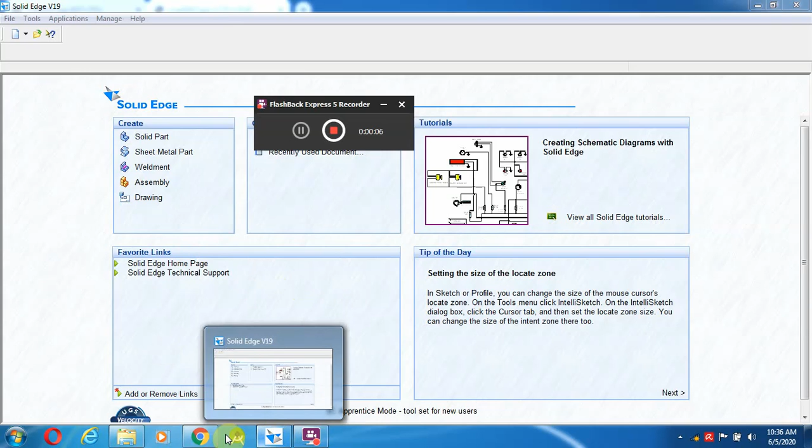Then comes the parts. There are totally 11 parts in the tool holder: tool holder, base plate, mover, stud, handle, knob, ball, spring, set screw, grub screw, washer. The 11 parts we have to create with Solid Edge, and after creating we are going to make the assembly with the help of assembly in the Solid Edge software.

So first we are going into the solid part. After going into the solid part, we are going to create first the tool holder. First part is tool holder. There are only two views given, the sectional front view as well as the top view provided for the tool holder.

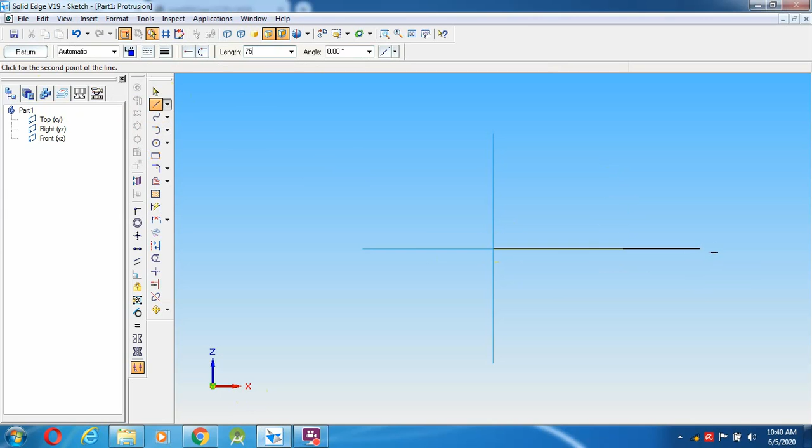So select a line from middle to 75, enter, again 75. Now I am going to give 150 and angle is 180 towards the left side, so that angle comes as 180. Now again 150, enter. So here 150 is going to join over here.

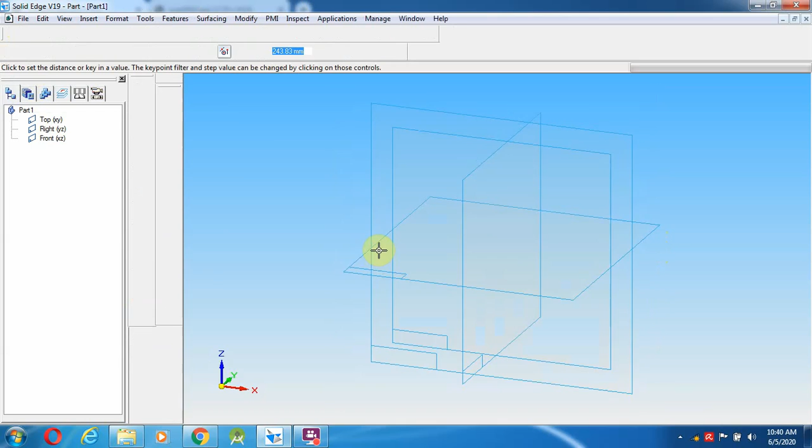Then select the line and delete those reference lines. Then give return. So how much mm does it have to be? 30 mm in depth. So 30, enter, left and right click. After giving this, I am going to make another one, the next smaller one.

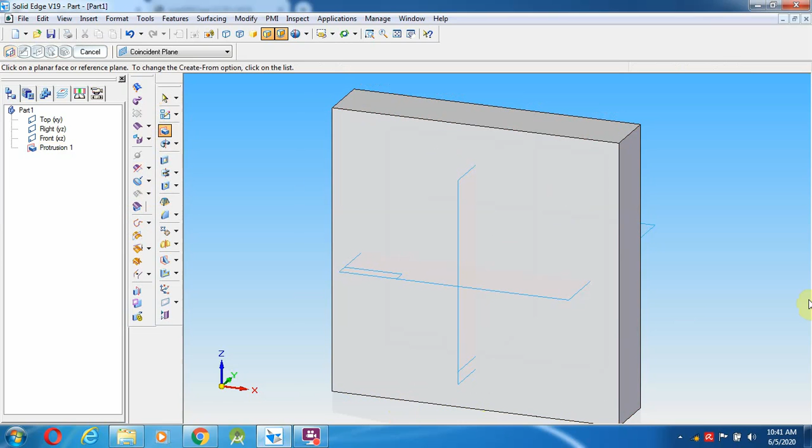This also they have given here as a square, 80 mm. Seeing from here it will also be square, even with the help of this dotted line you should understand. That is the depth of 40 mm. So go over here. Either this side or that side, you can choose anything. I want to keep the plane on this side, so I am going to select this side to draw.

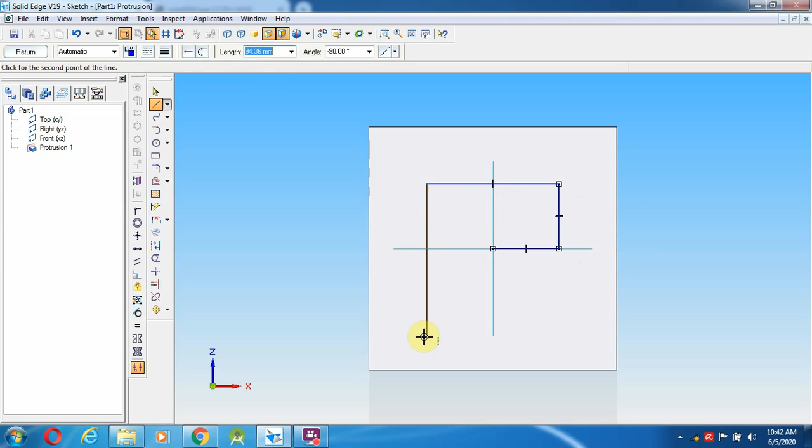For this one I'm going to select a line from here to 80 mm, meaning 40 mm distance, and again 40 mm towards the top. Now I'm going to give 80, enter, again 80, enter, 80. Now I'm going to join these lines, then select the particular line and delete that line. Now give return towards this side, so depth is 40 mm, it has to come over here.

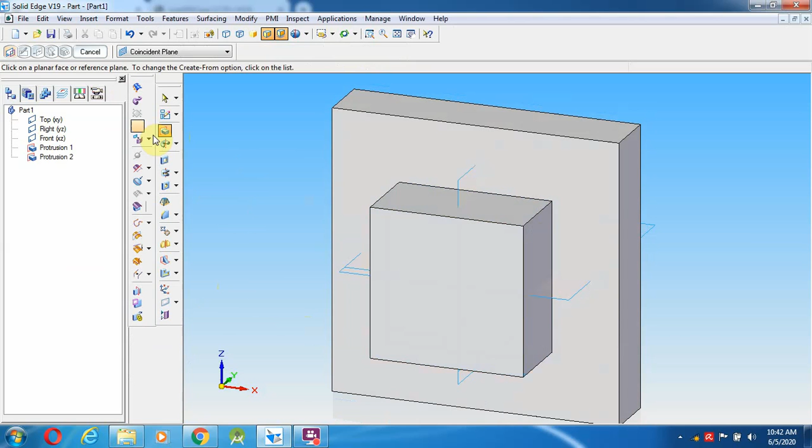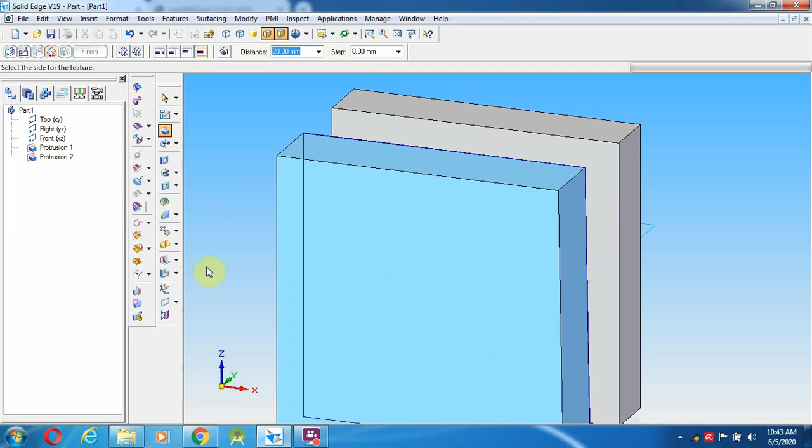After creating this, again go over here, select, and we are going to draw the bottom block. The bottom block has the same dimension as the top one. So select the edges over here, and I am going to construct; the dimension will remain the same, give return. This will be 20 mm distance; see over here the depth is 20 mm. So select distance is 20 mm, enter, and towards this side left and right click.

Now I am going to rotate the component, then you can save it. Go to Save As, and you can save it in the particular area.

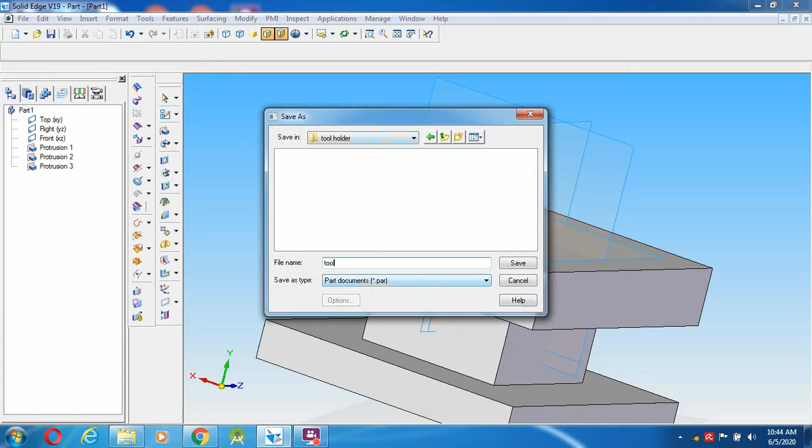So I created the folder over here, tool holder. So there I am going to save the particular things. Go over here, save as, and change the save location to this tool holder folder. The component name itself I am going to change, make it as tool holder. So the component has to be saved over here. Still so many things have to be done over here, so that is what I am going to do now.

So select first the dimension from here: it is 120 mm length and breadth. Okay, the holes have to be placed. These holes are in continuous line, so from the top they can be viewed. The dotted holes could not be seen from the top, so they will be in the bottom block. In the top block there are 8 holes, M16 tapped. So 8 holes will be placed, and they are threaded.

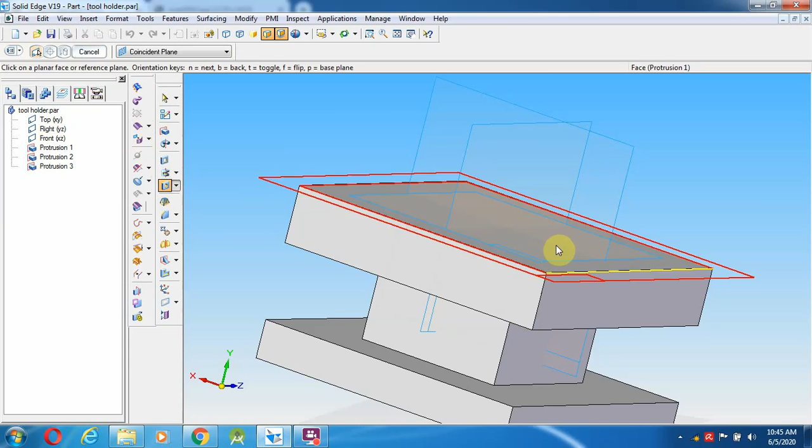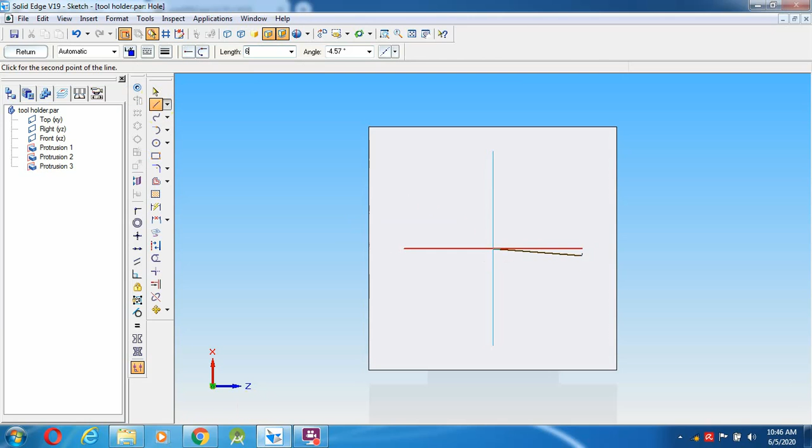Okay, so I'm going to select the hole command. I'm selecting the top surface. In the top surface I'm going to make a 120 mm distance first. From here to here 120, and in the horizontal also it will show 120 mm. So select a line. From here to 60 mm length, and 60, 120, and again 120. Next 120, then I'm going to join over here.

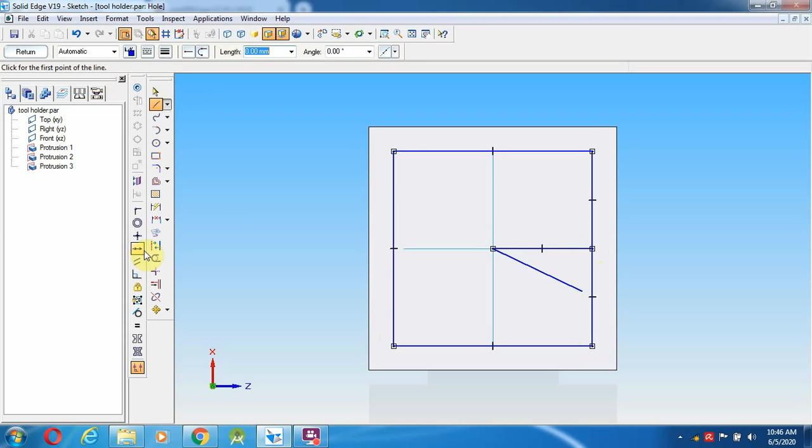Here I drew two lines: one line for reference purpose, and another line mistakenly. Those lines I trimmed. After that I select the hole and change the hole parameters. The hole is given as 8 holes, M16 tapped. That means 16 mm diameter, and 8 holes have to be placed as threaded holes. So make it a threaded hole with 16 mm diameter, select M16, 16 mm, and the hole extent.

Because the hole comes throughout, the tap comes throughout. If you see from here, a continuous line followed by a thin line. Thick line followed by thin line is the symbol of a tapped hole. So select through, which means through to next. You can even give the dimension or through to next. After that, the through hole will go throughout that particular top surface, so the bottom does not require any V shape.

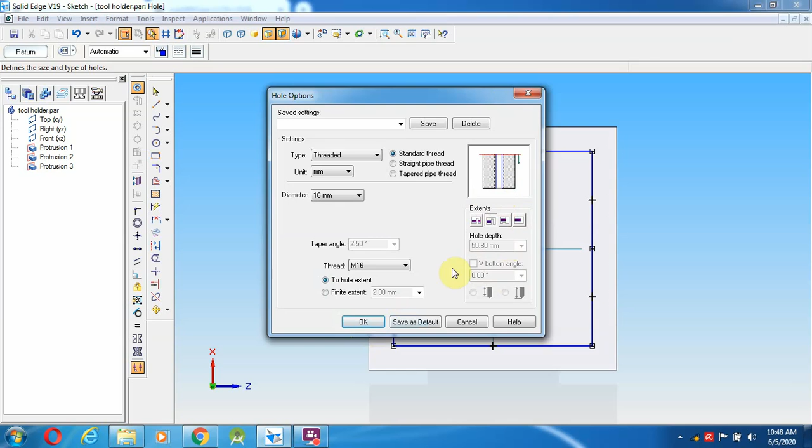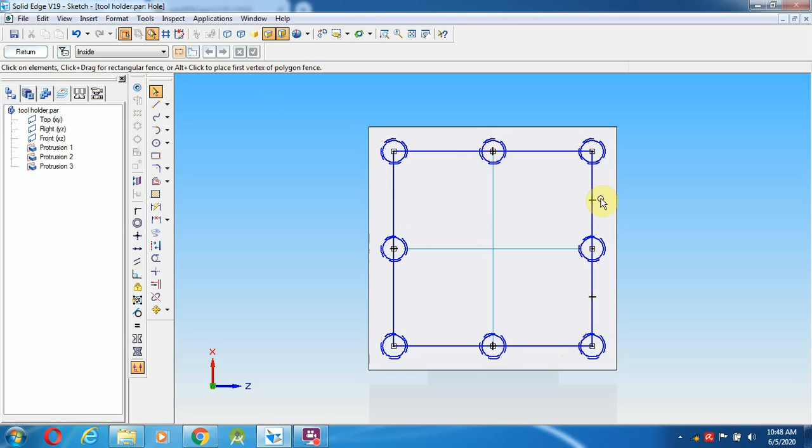So 8: 1, 2, 3, 4, 5, 6, 7, and 8. So there are 8 holes now. At the corners as well as in the middle I am going to place the holes, corner 4 and middle 4. After placing, give return, then left and right click. If you see over here, the holes are created in the top. Then immediately you can save. After saving, another hole comes in the bottom. See over here, it comes in the bottom.

The hole length is 16 mm and the diameter is 10 mm, with V shape. So how many holes are there? See the dotted holes provided over here. There are 4 holes. It is a normal hole. The distance is 52 mm, and the other side also is 52 mm. Horizontal 52 and vertical also 52 mm distance.

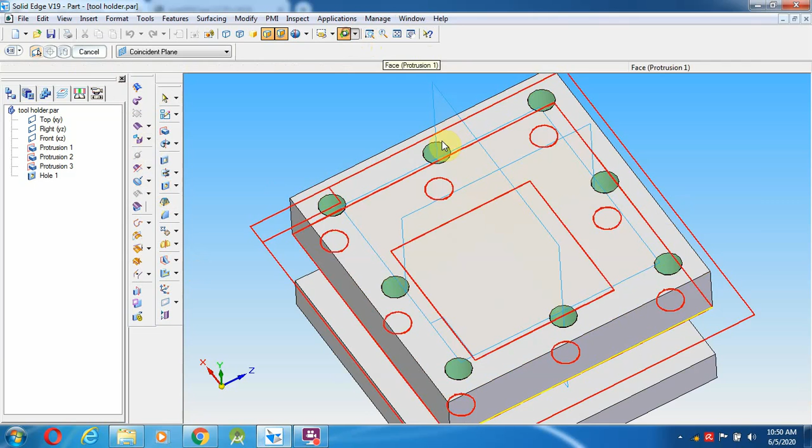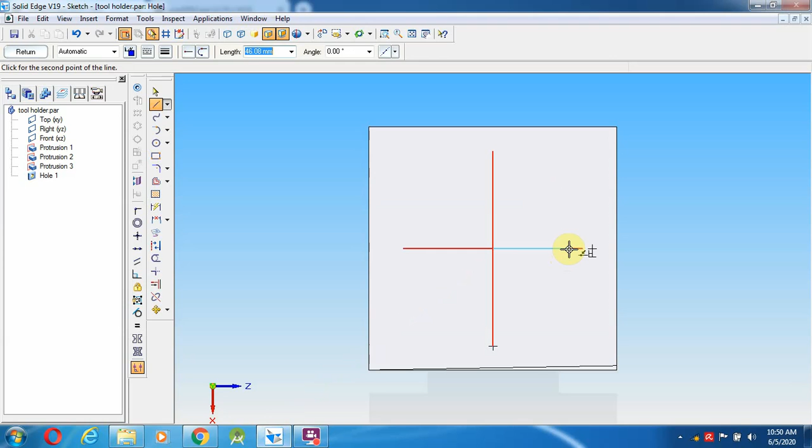So go here, select the hole option again. I'm going to rotate the block, give fit, and select the bottom. After selecting the bottom, select line from the mid line. If you cannot find the mid, you can draw a line and find the mid. So 52 is actually from the mid, no need to worry. So 52, enter. Again 52, enter. 90 degree, enter, and 104, enter, 104, 104, enter. I'm going to join.

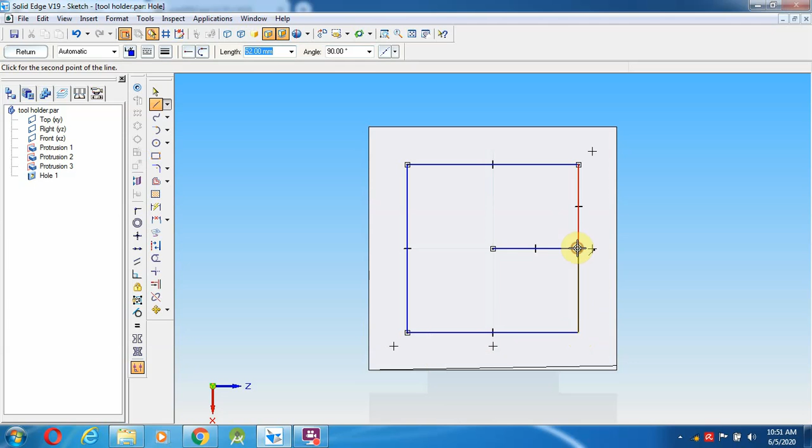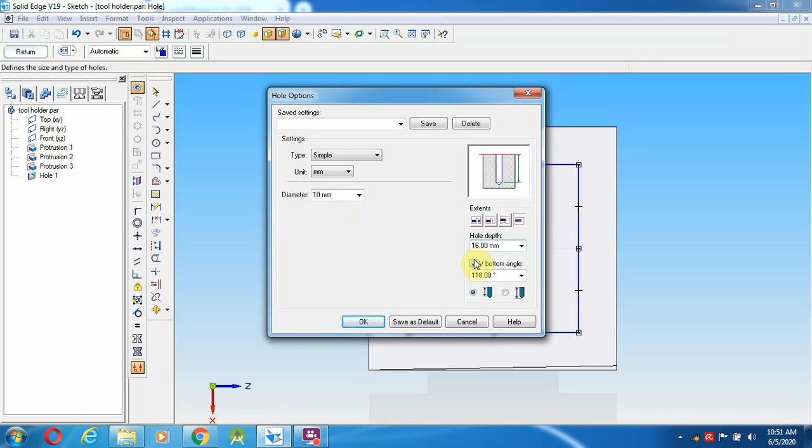You can keep this line too, nothing will affect it, but it doesn't look good, so I'm going to delete it. Go over here. The hole is a simple hole, diameter 10 mm, and instead of through to next, a finite extent value. The length given is 16 mm, so I select 16 mm here. Then V bottom, and in the V bottom I give 118 degrees. So it will be placed exactly on the mid of the lines. I'm going to keep it in the mid.

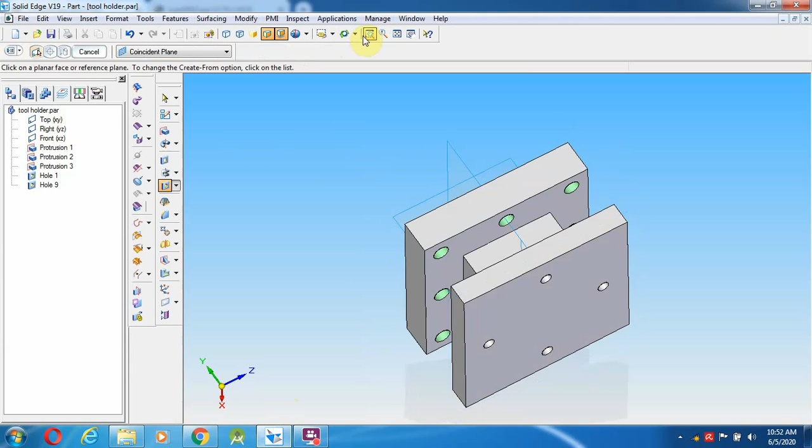So after keeping all the 4 holes, I'm going to give return towards up, left and right click. So always we used to give left and right click. Okay, so if I am giving 45 degree, automatically the V shape will come up to the surface. That's why I have not given it as 90 degree over here. Then I am going to give close, then save whatever I have done. So after doing this, I am going to make this hole.

Okay, so that is given here as 60 mm as well as the 1.5 mm one, and another one will be the 10 mm. So the straight cylindrical hole comes up to 10 mm distance, and the 1.5 mm comes as a small taper. That's why here it will be showing two circle edges. This edge indicates this one, and another edge indicates the 45 degree where it cuts the bottom edge. So those edges are shown as those two circles over here.

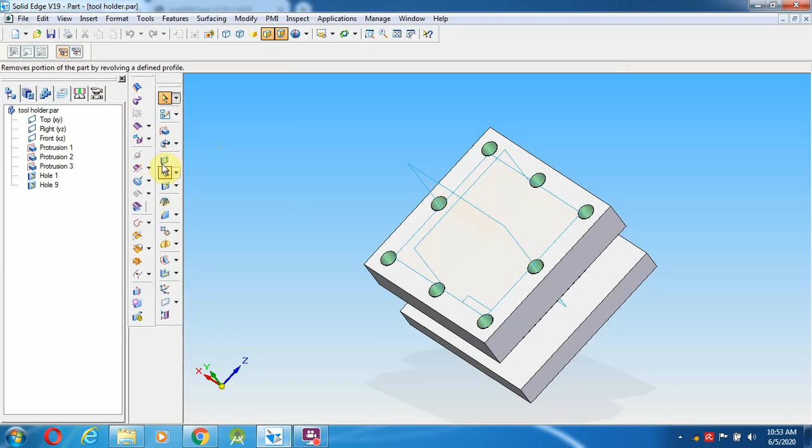Okay, then go here again. I'm going to select the bottom circle, go here, and select the revolved cutout option. That means even in a single step we can complete it. So revolved cutout. Now I'm going to select the mid plane. So here this is the mid plane. Okay, so those things come in the bottom over here. So that is the thing I'm going to draw.

So from the middle to 12.5 mm, so 11.5 mm, 11.5 mm height, and now the diameter they have given is 60 mm. Okay, so 60 mm means from one side I'm going to draw 30, and towards down up to 10 mm. So after 10 mm I'm going to make it 45 degree. So this is towards left, 180 plus 45, 225. So I'm going to give 225.

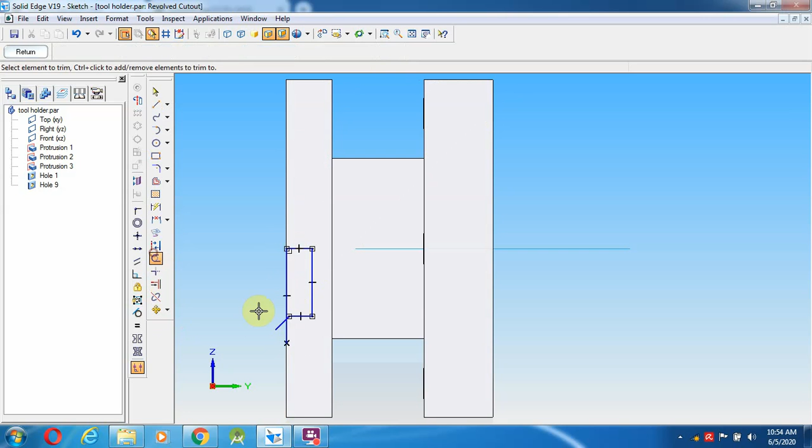Okay, now I'm going to complete. So this surface I'm going to close. Then with the help of the trim option, I'm going to trim these two lines. Select the axis of revolution as this. I'm going to give return and rotate, and I'm going to see the rotation. So 360, or otherwise here there is one more option called to 360. So automatically it will be created. Okay, so this way you have to do this particular cutout in the bottom.

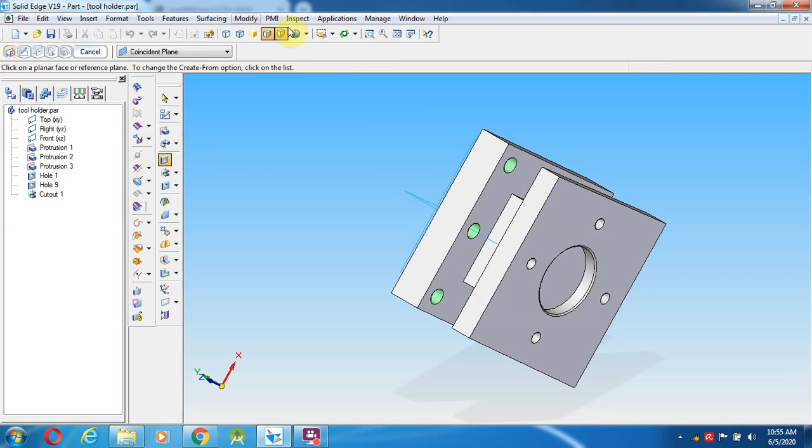So after making this, go over here and select the full depth hole. Okay, so what is the diameter of the full depth hole? The full depth hole is 26 mm. That is shown in the top view. So I am going to make it with the help of the cutout option. Bottom surface or top surface, you can select anything, because the hole comes throughout the component. So I'm going to select the bottom because the view will be clear.

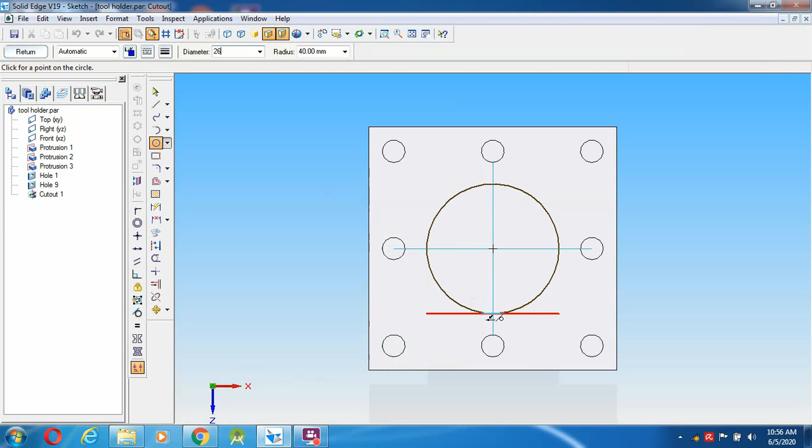So cutout and select the circle. Here once again I'm going to check the dimension 26. So 2, 6, enter. I'm going to give return towards down, left and right click, and save the component. So after saving, this has been created here, even this hole, and almost everything is created over here. Anything left out we will see while assembling, and at that time you can change it. So almost all the things we have completed. I'm going to save and close, then move on to the second component, the base plate.

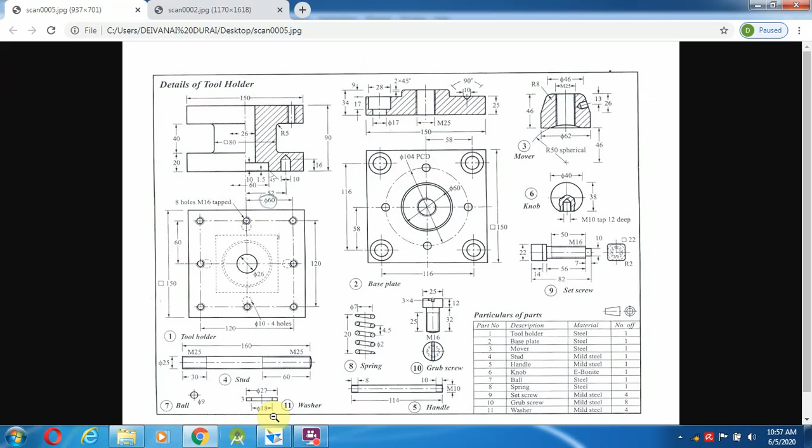Okay, so the base plate is provided here. For the base plate only certain things you have to remember. Okay, almost everything is completed. I'm going to save this. After saving, I will check. Even some more things you can do with this. So I will close, and again select a solid part. After selecting the solid part, now I'm going to do the base plate.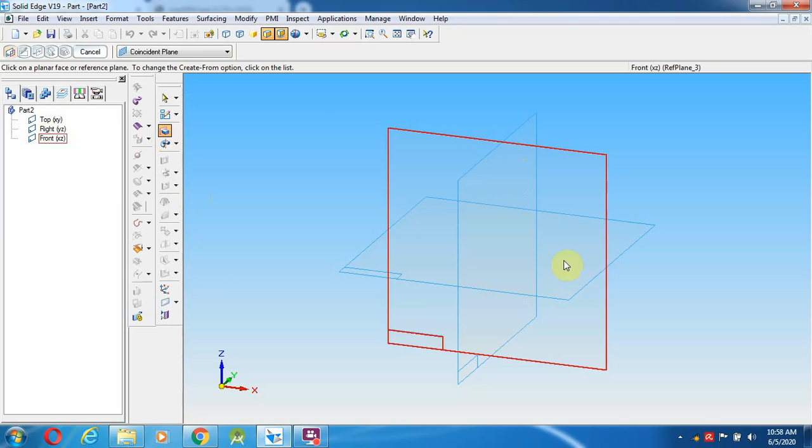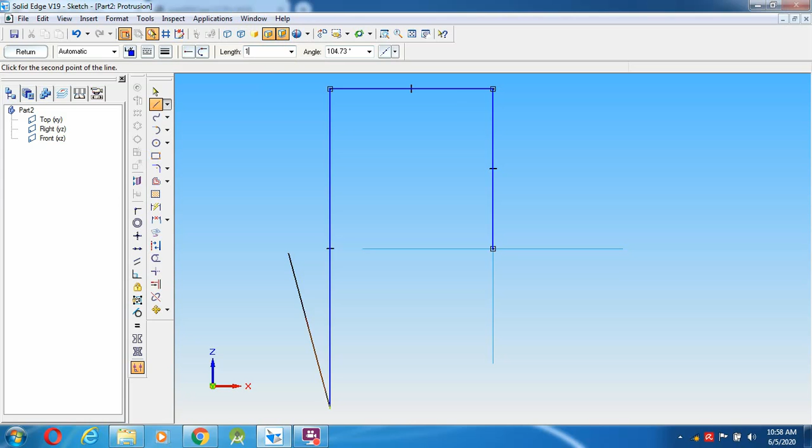So the base plate has length and breadth of 150 mm. Here it is mentioned as square 150. Select protrusion and from the front view select 150, 75 mm, 75, enter, again 75 mm, enter. So here 150, 75, 150, enter, 150, enter. Going to close over here and use the trim or delete option.

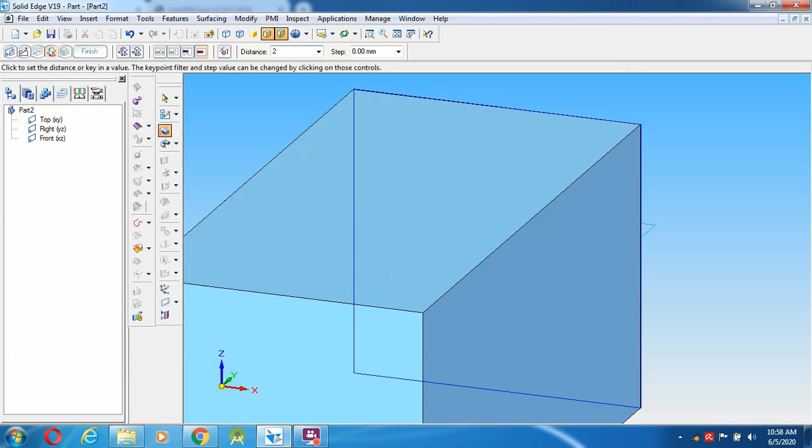Then give return. So what is the depth of the component? It is 25 mm. So I'm going to give 25 here, either front or back, it's not an issue. Then on the top there is a V cut placed here to place the ball. That V cut is a 90 degree angle. The holes are placed on a 104 pitch circle diameter. There are 4 holes to be placed, and the hole diameter is 10 mm. So I'm going to select the hole option again, selecting the top surface.

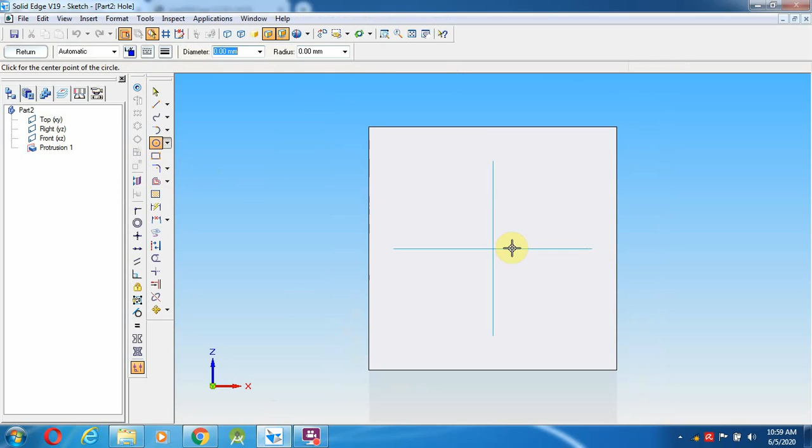So select as a circle, pitch circle diameter as 104 mm. 104, enter, and select hole parameter, and go here like a normal simple hole only. The diameter I am going to give 10. Diameter is 10. After giving 10, okay, it's not through, so it's not full. So here the hole depth, it is not possible to give 0, so I am going to give 0.1

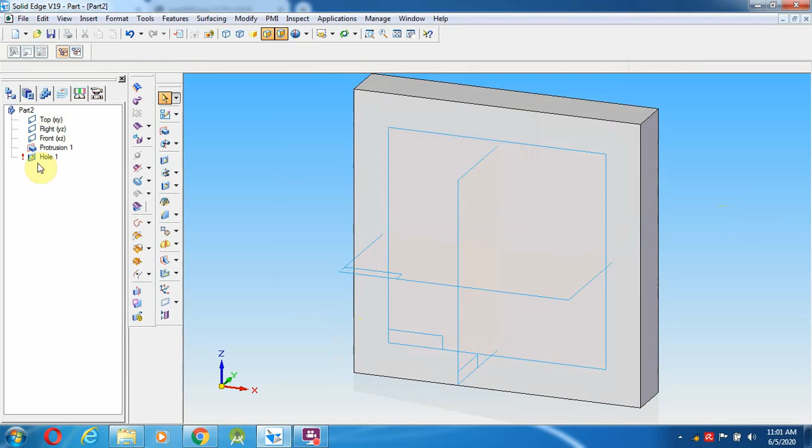and V bottom angle. So the angle is 90 degree. Already they have given it in the question. Then from here, we can choose over here. Okay, and select, give OK. I am going to place it on the mid circle over here, somewhere here. Then going to give return towards left and right click. So some problem may occur while selecting those things. So once again we will do it.

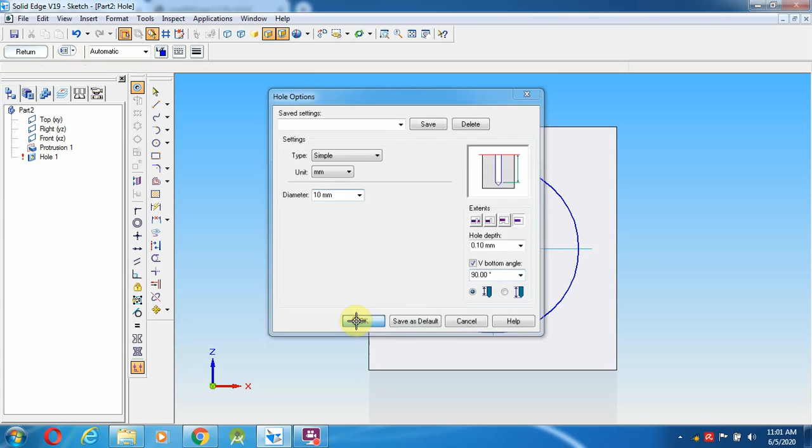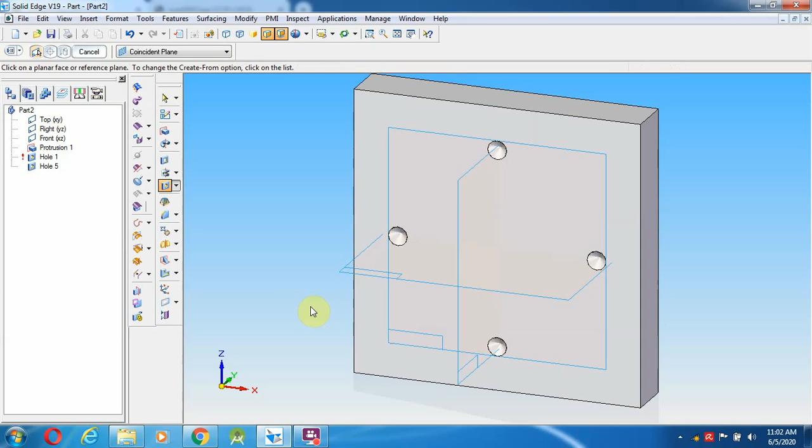So from here I am going to make it as a circle with 104, 104 diameter. Again I am going over here, select the hole parameter, simple 10 mm. So hole depth 0.1 as well as V bottom, and you can maintain this at 90 degree. Give OK. I'm going to place it over here. So after placing this, going to give return towards down, left and right click. Okay, while selecting from top to V bottom end, it created the problem over here, so we can rectify it. So then the hole comes over here.

Now the next thing is we have to do this particular surface. Okay, so that has a diameter of 60 mm. 60 mm. What is the height? So total will be 34. 34 minus 25, there is 9 mm. Okay. So 60 mm diameter as well as 9 mm height. Okay. So I'm going to do that 60 mm, not 34, 60 mm diameter.

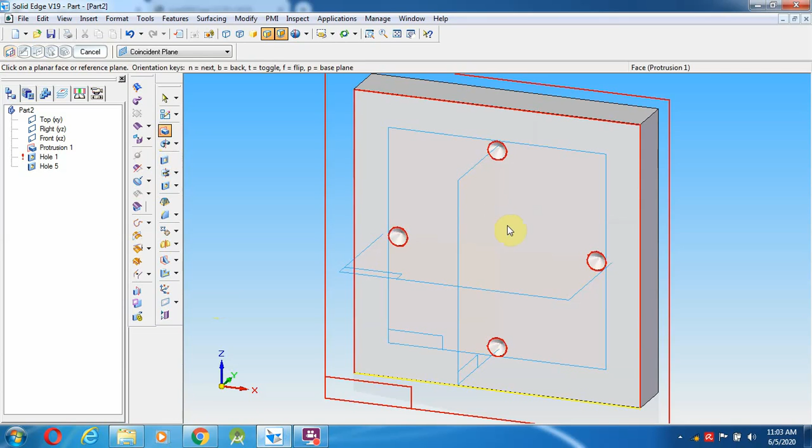So going to select protrusion. So this particular front surface, select circle, and from here I'm going to make this 60 mm diameter, 60, and going to give return towards front. So this is going to be 9 mm. Left and right click, go over here and select the round option. So the round option, I'm going to select this particular surface, not round, so chamfer.

Okay, so we'll see over there. So here they have given us 2 into angle 45 degree. So it comes as a chamfer. So I'm going to select the chamfer over here, top, setback I'm going to give 2. So with the 45 degree angle, the chamfer is created over here. So after creating this, I'm going to draw the middle hole.

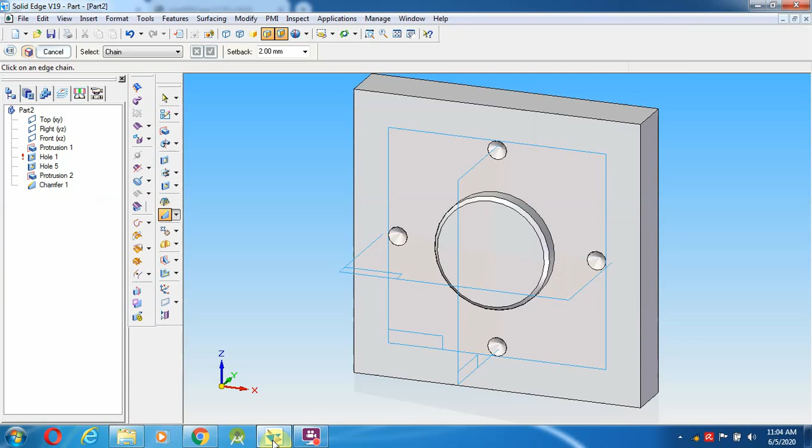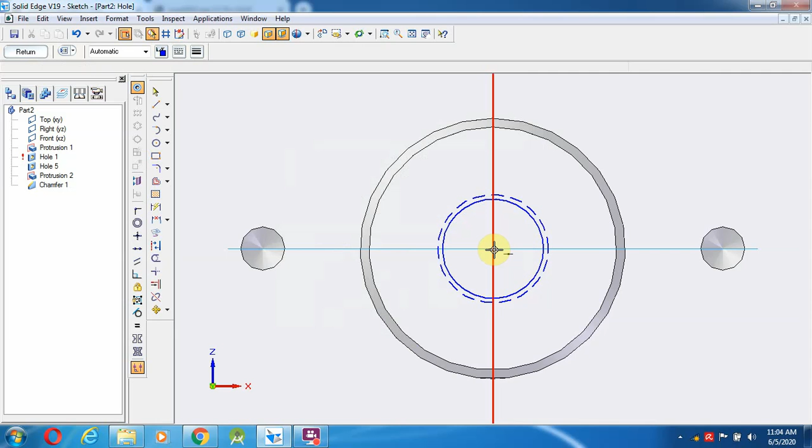So what is the middle hole? M25. Okay, M25. So from here, select the hole. So the top surface, and go to the hole parameter. So it is a threaded hole, and I'm going to give M25 and hole extent through next, give OK, and I'm going to select as a midpoint. Okay, then give return towards left and right. So that hole is created over here.

So after creating the hole, the next thing is to place these 4 holes. Okay, so these 4 holes, what is the distance? 116 mm distance horizontal and vertical. And the hole is a counter bore hole. The counter bore depth is 17 mm. Counter bore diameter is 28 mm and hole diameter is 17 mm. So once you have completed this, this particular portion is done.

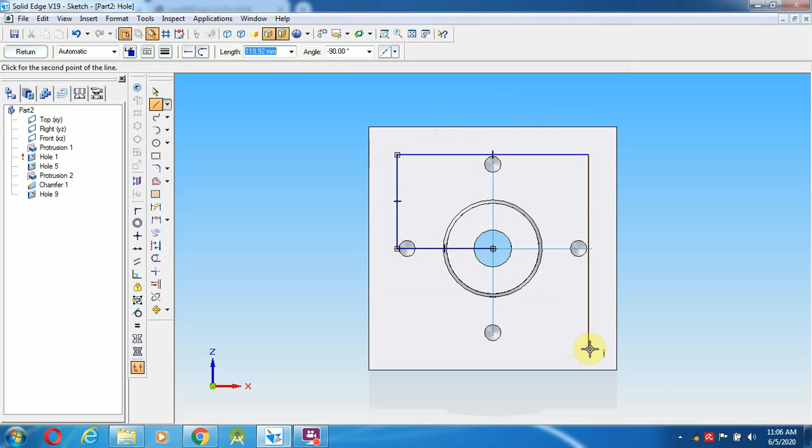So I am going to select again the hole option on this particular surface. Select line from mid, 116 mm means 58 mm. Okay, so 58 and again 58, and 116 mm, 116, angle, enter, angle 0, and again 116, enter, 116. Going to join over here. So these lines,

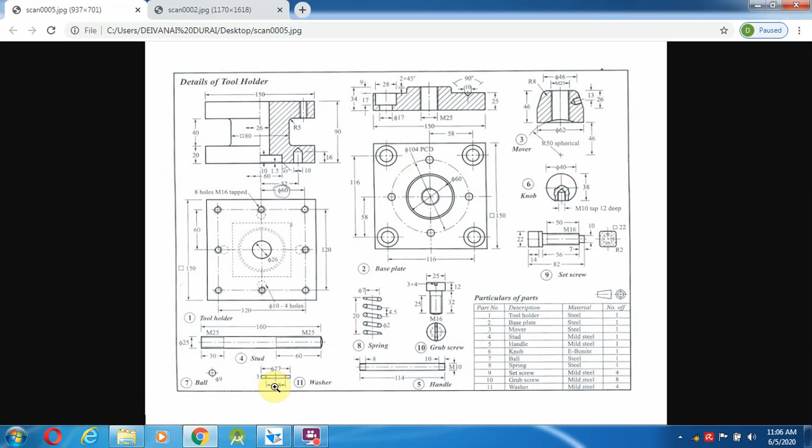trim, go to your hole parameter, select here as a counter bore hole. Okay, so the diameter of the hole is 17 mm. Here you have to remember: hole diameter 17 mm, counter bore diameter 28 mm. Okay, so counter bore diameter is 28 and the normal hole is 17 mm. The counter bore goes up to 17 mm depth. Okay, so the counter bore depth is 17.

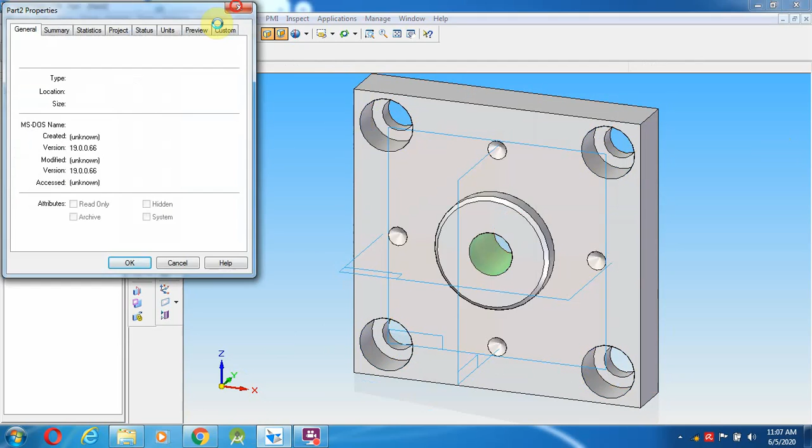Okay, then through next you can give, and I'm going to place them in the corners. Okay, so once you have placed them in the corners of the lines, then give return towards left and right direction, and going to save the component with the name of base plate. So go here, select base, B-A-S, base. Okay, so after saving this, you can close it.

Okay, so with these points, this video is going to end. The remaining things we will see in the next video.